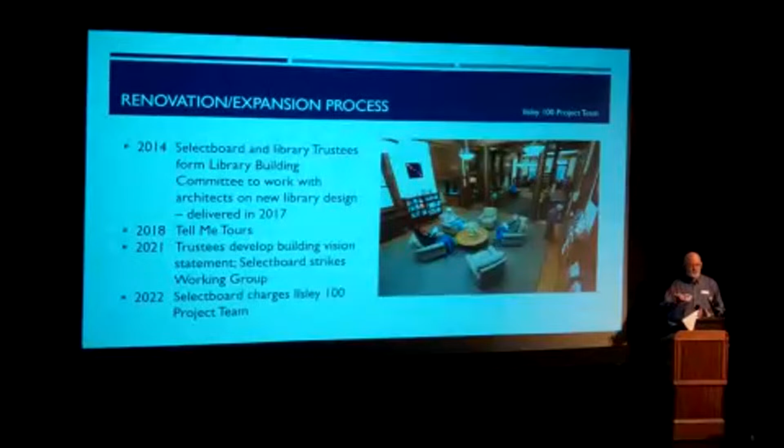Just to give you a quick recap on how we got here: there was the Library Building Committee from 2014 to 2017. When Dana arrived in town, she did a series of focus groups called the Tell Me Tours. The library trustees developed a vision statement for the building, and then the select board struck a working group to think about how to proceed and started the Ilsley 100 project team in March of 2022. Since then, that group has done a lot of work educating ourselves about how libraries work and best practices. We've looked at the space needs of the building, determined some costs, and done a lot of feedback with all of you.

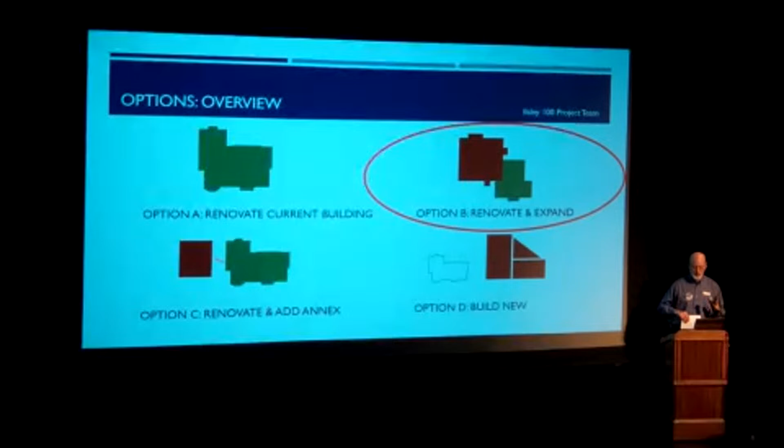Last fall we did some work on what, in general, our approach should be to having a new library. We looked at four possibilities: one was to just renovate the current building but not expand it; one was to renovate and maybe add an annex; another was to build new on an entirely different site. But the one that we got the most positive feedback on was to renovate and expand on the current site. And that is the plan.

So we then embarked on a plan to recruit the best architect and design firms in the state of Vermont, and engage them in what we're calling a design competition to come up with some ideas for us to look at. One thing you'll notice in these designs is that they've all come up with a concept that honors the original building, but they also all envision taking down the existing additions which have been put on more recently.

Anybody know how much the existing building was supposed to cost? It was supposed to cost $50,000. Can you believe it?

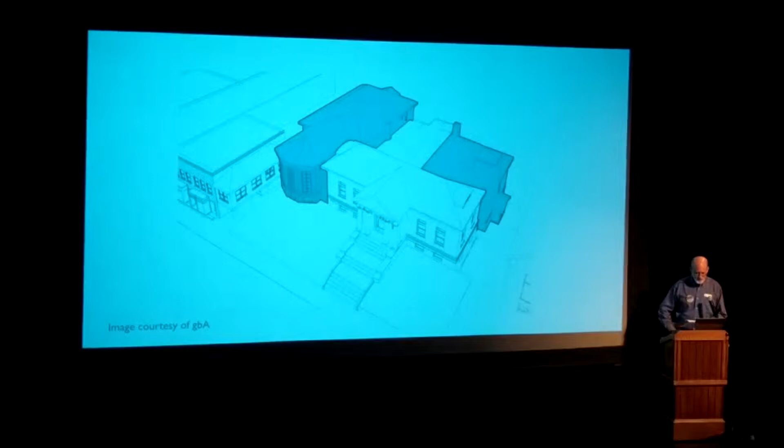Now, it doesn't show up well in this picture, but if you approach the library from the back and look over to the right, between the 1980s addition and the Marquis Theater, there's a lawn. There's a grassy space there, and all of our proposed designs are going to make use of that space.

Now, I wanted to touch briefly on the idea of putting an addition on a historic building. When you look at these designs, some of you are going to say, gee, that looks awfully modern, why doesn't it look more like the original library? Well, architects and historic preservation experts say you don't actually want an addition to a historic building to imitate the original. You should be able to look at the addition and see that it's distinct from the original. It might echo some of those architectural features, and it should enhance the original, but it shouldn't imitate the original.

As you're looking at these designs, I want to remind you that you're looking at what we're calling conceptual designs. We ask these firms for ideas, and computer-assisted design today lets companies produce the most sophisticated, spectacular graphics you've ever seen. And these designs look like we could break ground tomorrow.

That is not the case. If we were looking at these 50 years ago, we'd be looking at pencil markings on tracing paper, and if you didn't like something, the architect would just get the eraser out and erase it. I'd like you to think about these images in the same way. If you see something that doesn't appeal to you, don't panic. If you don't like the type of material being proposed for the outside of the building, we can change that. If you don't like where some function is located in the building, we can change that too. So don't get too attached to how things look. We're really looking at big ideas and concepts here.

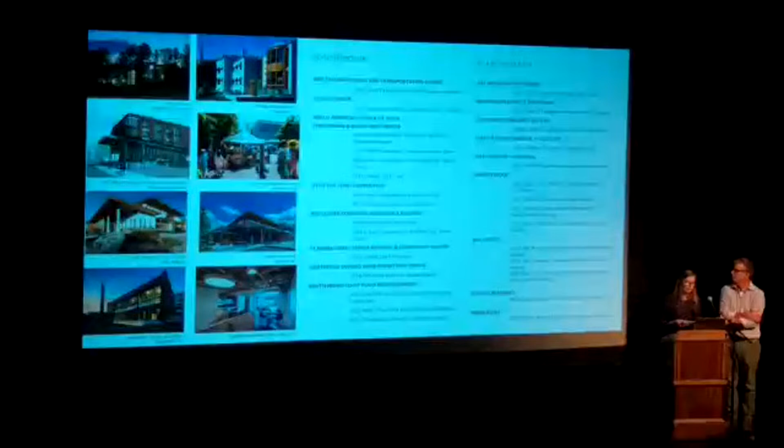So we have a talented team of architects where collaboration and teamwork are really essential. When we work on projects, we work on them all together, so it's really important for us to have a full team, everybody working together on the project. That's who you see up there, that's our team. As I said, we work on school design and libraries. Focus is really important to us as well as environmentally and socially responsible projects. Our design awards reflect our commitment to beautiful and sustainable places. Our team has received over 60 international, national, and regional design awards for excellence. In addition, GBA has received numerous sustainability and green design awards for our dedication to integrating the natural and built environment, including designing over 10 LEED buildings.

White Box Design Studio, we have brought on board with Kelly Bauer and Courtney Cox. We've worked with them, Courtney Davis... Courtney Cox is on Friends, she's nobody else called that, I was just checking to see if people are still listening. We brought them in because they work on numerous libraries every year, and they're at the forefront of library thinking. So we wanted to have them as a team member and a resource for you.

Our typical process, and this is our conceptual design up here for this competition, usually involves having discussions with the owner and the community before we put pen to paper. This is a little different process for us since we couldn't discuss the program with the client. So we based our concept design on the RFP, a site walkthrough, our prior knowledge of working with the library in 2017, and through working on other libraries. If we're selected, we consider this our design response, of course, but it'll be based on the community and your input for sure. So this is not the final design, and I know Joe mentioned that earlier.

Oh dear. Somebody has some music. That's a big thing.

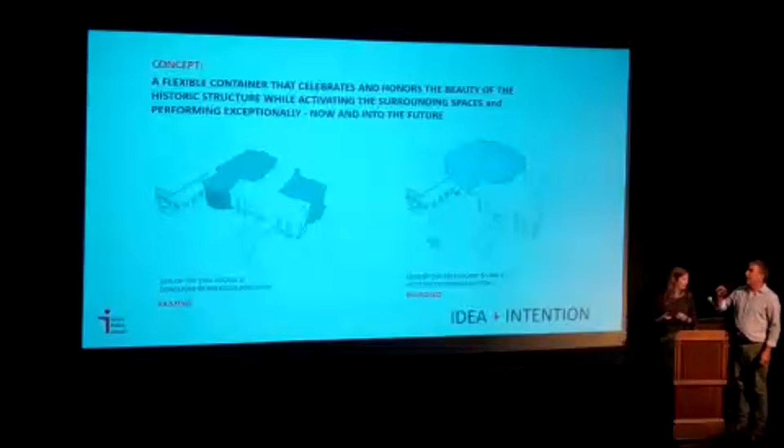This is concept design, and you've seen the image on the left before. We think the concept is relatively simple: over the past few additions, to increase program space, buildings have been glommed onto each side, hiding the beauty of the historic buildings. So with this new addition, we're making a flexible container that can change over time, but also highlights what's beautiful about the Ilsley. Currently 50% of the building is covered by additions, and we're looking to expose 100%.

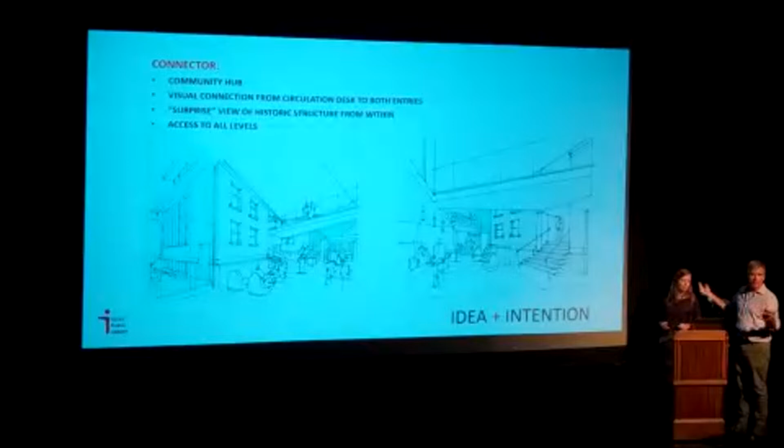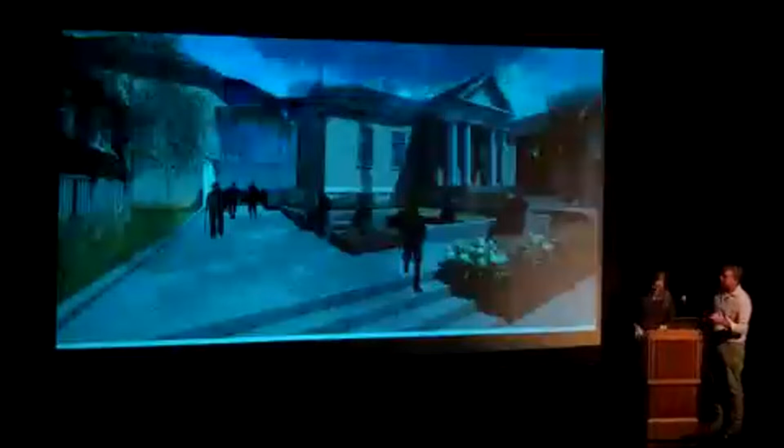Oops, I'm going to do that one more time just because it's pretty fast. Now I can talk through it.

Here we go. This is walking from Main Street towards the entry. We'll walk past the part covered by the '88 addition, but the key thing you could have missed looking at the building is you see the welcome desk right away from the entry. Here's this person spinning around, you can see the elevator and the stairs and looking back into the reading room, and then bridges up above, open space for the first and second floor. It's really highlighting the 1924 building.

But then as you walk in this side, you can see the welcome desk is there too, and there's a book drop. So it's really about this being the central community hub.

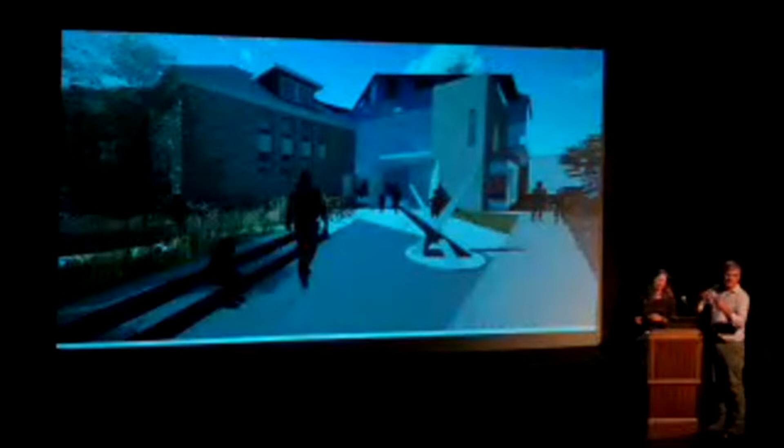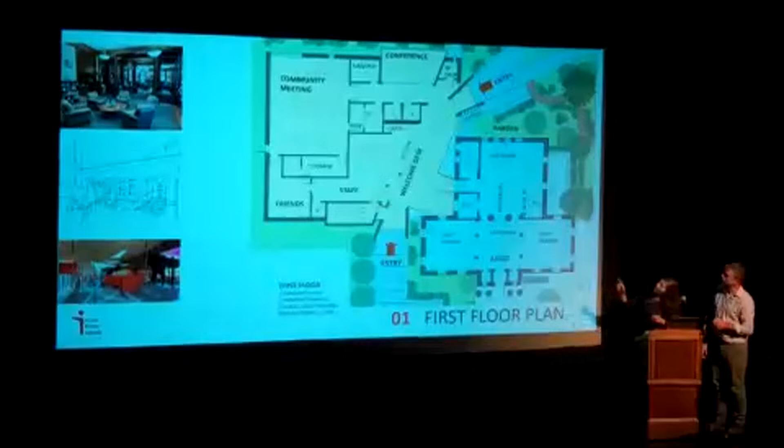Also with our conceptual design response, we looked at having a really simple container that was flexible for the new addition. We love this because it has a lot of opportunity to expand or change over time, and that's important because hopefully we'll be here for another 100 years.

The community space, we know it's kind of down below now; now we have it up on the first floor. You're able to fully open it up at night when the library is not in use. We have the adult stacks over in the existing building, and we love the building you have over here, we thought that would be appropriate. And then there's an opening to this reading area between the town offices, and that's where the '88 addition is too.

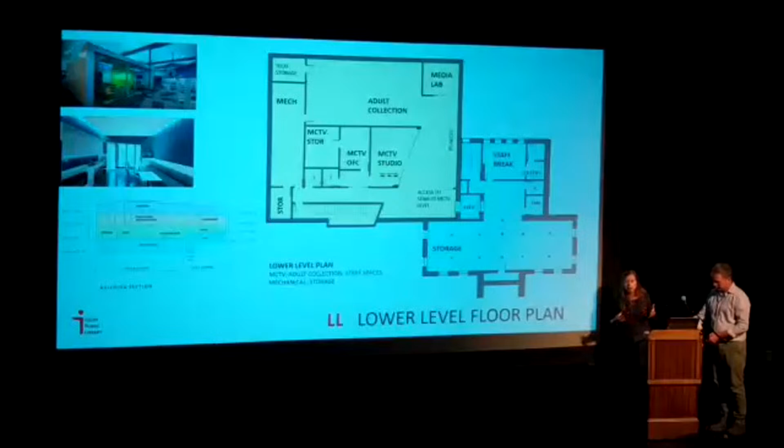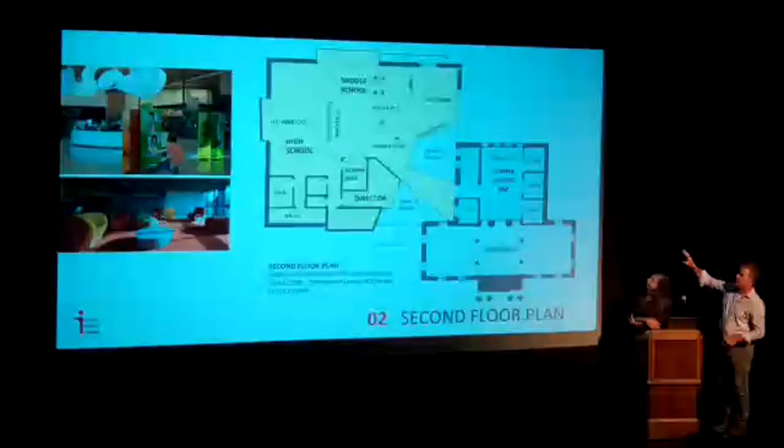We made a good guess at it, but it does provide tons of opportunities with this simple container. The big thing is delineating those spaces with furniture rather than walls, and also picking up on cues about what the existing and old is—the community living room looking down at the adult section, and when you enter from the elevator looking down into the other.

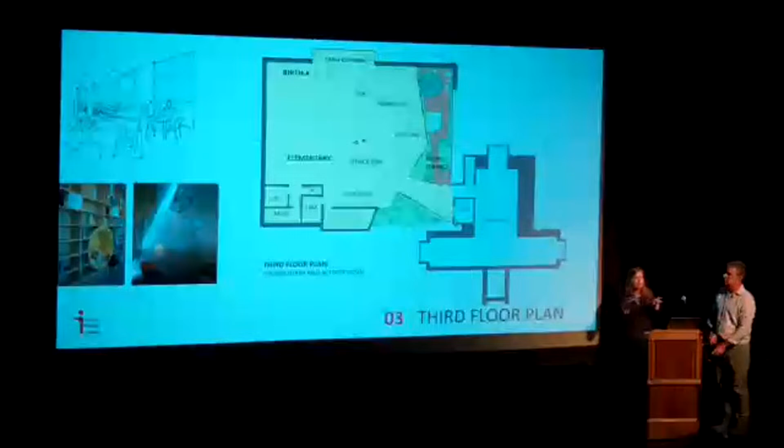So there's some similarities between this addition and the existing. This is our third floor plan, which is even with the MCTV floor level you have now. This is where we put the children—we thought they should be out of the basement and up, kind of celebrated in the place with the most daylight, and also be a safe space.

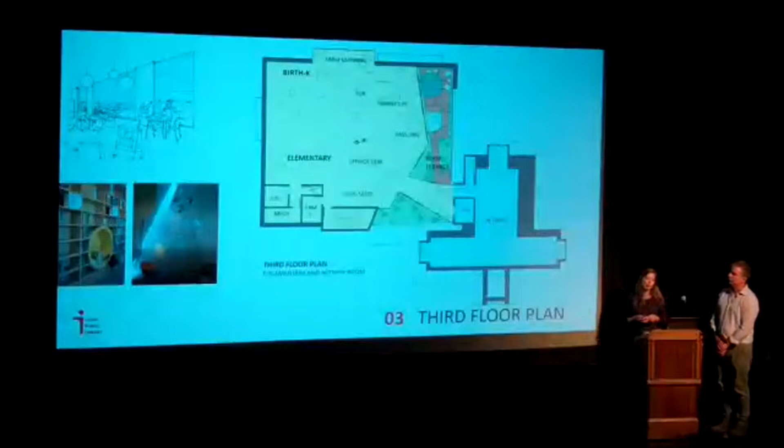We've created a roof terrace adjacent to the children's area. This is a great place for programming, not only for the children's group, but for anybody in the community to go out and sit on the terrace with nice views. We really think it'd be a cool spot to sit up there and look at the roof of the Ilsley and the creek beyond. It's just a really unusual opportunity.

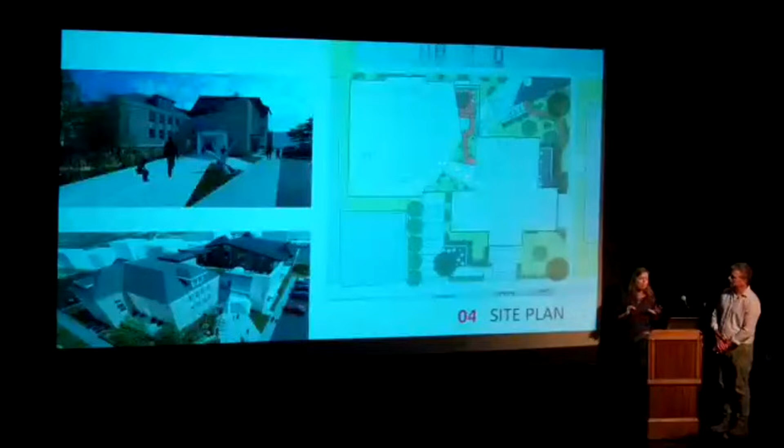This is a site plan, so we're looking down on the roofs right now. Again, you can emphasize that 1924 building, and that bridge is a connector with a simple box in between. You can also see that roof terrace, and you notice we have a lot of green space—as many opportunities as possible, because we know you already have existing programs where you use those outdoor gardens a lot. We want to build on that and create any opportunity for more programming and connection to the outdoors.

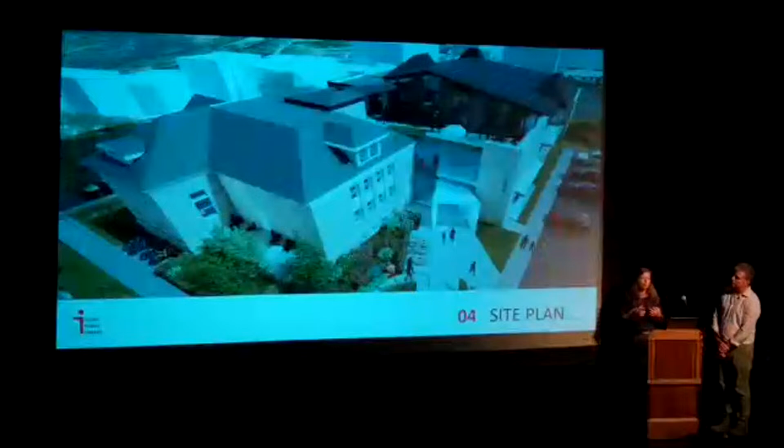Steve touched upon having that—where the stairs and elevator, removing that area gives us an opportunity to have a connection with the town offices, where you have a bench now that's highly used. This gives a bit more breathing room and a connection with that building as well.

So that's the general idea of the concept we're going with. A big thing, as Nathan mentioned, is we're used to working with the community early on at the beginning of a project—we didn't have that opportunity here, but we had great info. The Ilsley 100 project team and Dana put together these challenges and pillars. We took those, and I want to show how we'd normally work with you all, and if we're lucky enough to move forward, we'd revisit these ideas again.

We took all this information and asked where these things overlap, and how we could decipher these different challenges and pillars and respond to them in a building. These are the sorts of questions we're asking ourselves, but in a lot of ways we'd normally be asking you. We'd say, here's our ideas about safety—let's increase sight lines. So we did that with bridges and connections to the first and second floor.

We have low furniture so we don't have shelves blocking the way, and we have glass in the meeting rooms on the second floor of the 1924 building. But again, these are just things we're going to talk with the community about—this is really to emphasize that this is concept design.

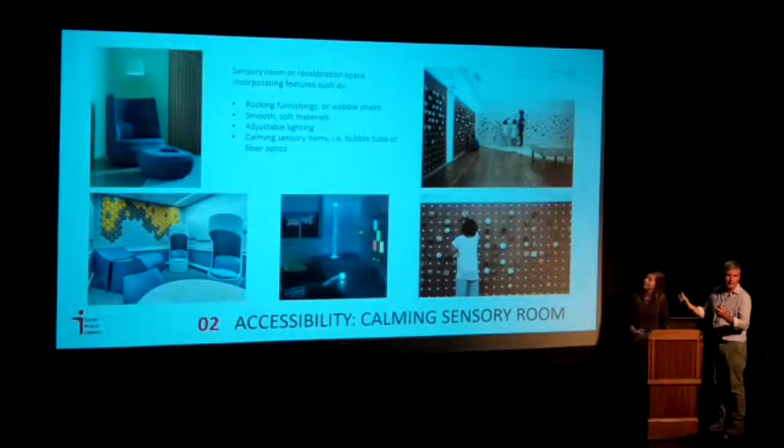You can do it in interesting ways that don't always require hard walls. Those chairs on the left are nice library chairs where someone can be cozy reading a book, kind of by themselves in the middle of an open space. There are really interesting ways to maximize flexibility without building hard walls. Another thing we said was a flexible container with storage.

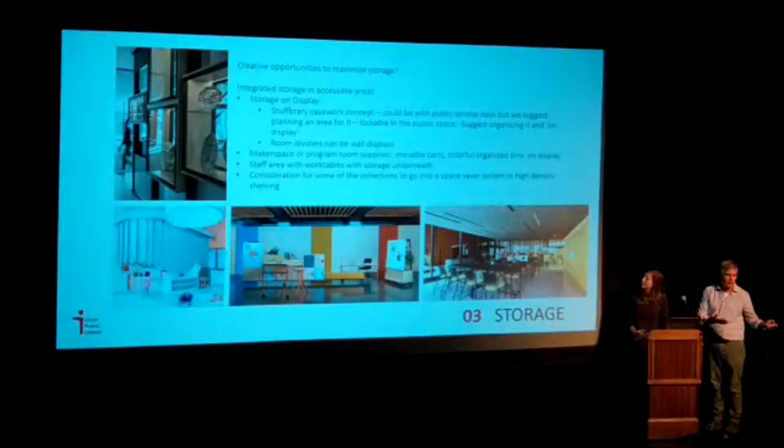It's incredibly important to have the right amount of storage. You need storage for things you'll only use twice a year, but more important is storage for things you put away for two days and bring back out. Where is all that stuff and how is it designed in the space? Even the stuff library concept, the casework concept - if you're lending out a microscope, where is that stored? Do people even know you can lend those things out? If we can start to put this stuff on display, it gives some really interesting responses.

Maintenance is pretty clear - we want things to be durable. A big reason for this is so staff isn't spending time cleaning and taking care of things, and can focus on patrons and programming instead. The funds that go to the library aren't spent taking care of things that aren't standing the test of time, but go to programming.

Functionality for staff - they need a place to go and regenerate, a place of their own, but also when they're at their station, they need the right equipment and capabilities so they can serve really well and aren't running off looking for something, and that has to do with tech support too.

We didn't do much on tech support because that's not really about the building, but it's fun to talk about. There are buildings now where robots go to cars and take the books - people don't even want the book truck, they want the robot. Now this one's very specific here, and we think this should be celebrated.

For outdoor programming space, we have it on the roof, building upon what the Ilsley has already done with outdoor programming space. We see that as the place for surprise and delight, taking every corner so the library is going out to the property lines, not just confined within the building.

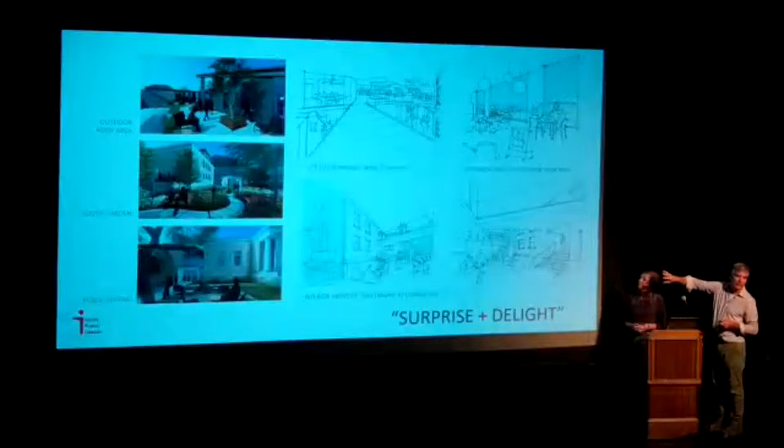On the upper left is the roof garden, we have the garden by the parking lot, and the outdoor reading area facing Main Street. Inside, the surprise and delight comes from entering the building and being represented with the 1924 building. These are all sketches we've done - computer-generated sketches as sketchy as our hand drawings over here. This is just the beginning.

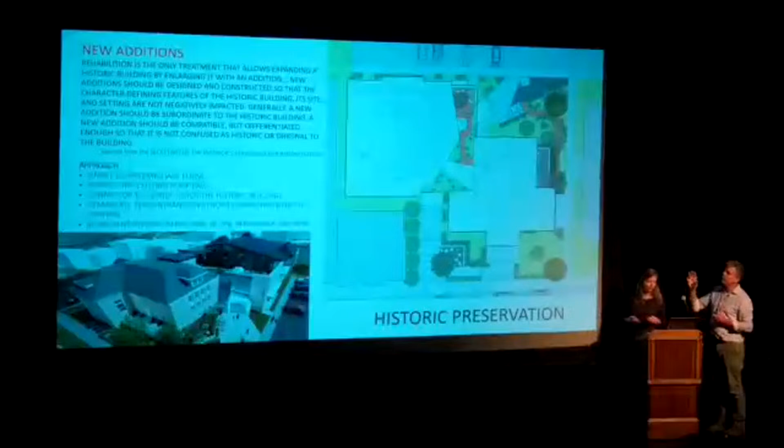I won't touch on this - Joe did a great job. We have a rectangular, or really square box, that we wanted to be complementary of the existing building, not overshadow it, but be respectful and honor the 1924 building. That's really what we were going for. Down here we tried to hold the eave lines - the roof of the existing Ilsley is playful with arched dormers, gable dormers, hip dormers. So this third floor we put on is like our new dormer, picking up on some of the major pieces but in a different way.

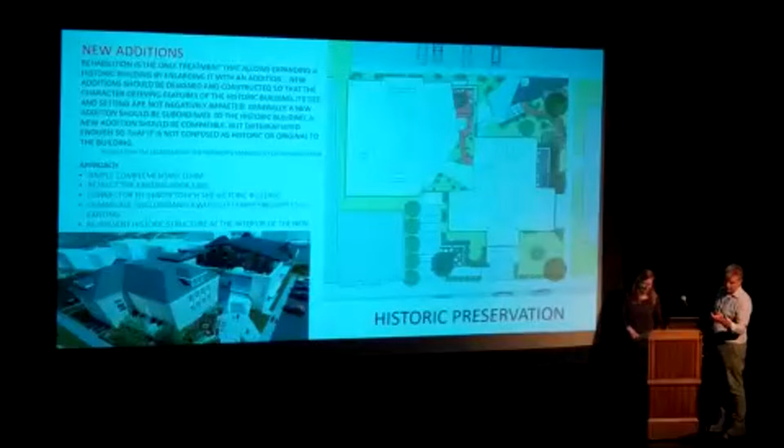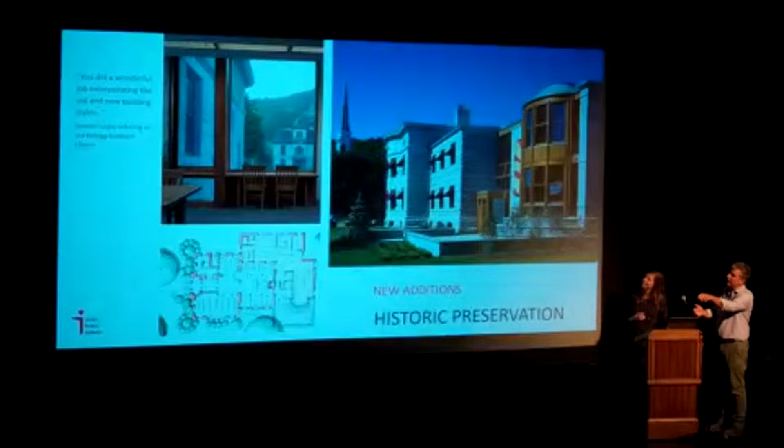This is the Ilsley, or the Kellogg Hubbard Library in Montpelier - this is the link we're talking about. In our case, that's the community hub where the stairs or welcome desk would be. This is it from the inside, with a similar treatment - from the outside you can see the existing building, and it starts to come to the inside. That's really what we're going for.

Sustainable design permeates all the work that we do at GBA, but instead of going through our whole process for sustainability, since time is limited, we just wanted to share with you a couple of the buildings that we're proud of.

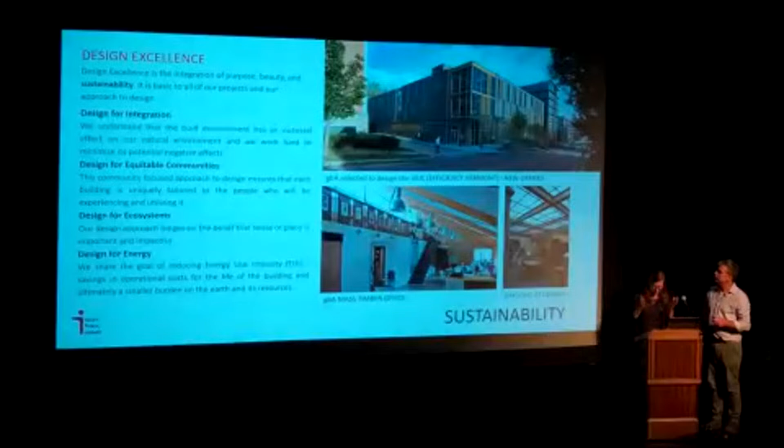One of our proudest moments was actually to get this project teaming with VEIC, the efficiencies in Winooski, a couple of years ago. They selected us for our commitment and dedication to sustainable design. We are known for designing buildings that have a low operational carbon footprint.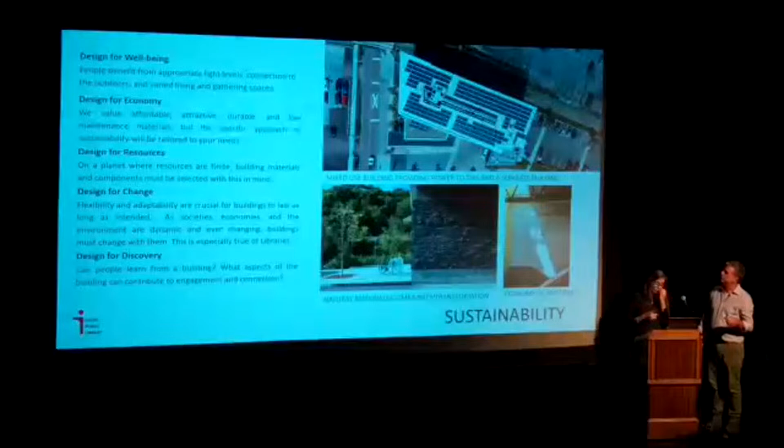And now we're moving towards low embodied carbon buildings. These are just some other examples. Almost all of our projects have PV or some kind of feature that gets us closer to net zero or net zero positive buildings. It's really just ingrained in everything we do.

So are we done? Oh, okay. Well, thanks for having us.

We hope we created a design solution here that honors the historic 1924 Carnegie-style building while providing a forward-thinking solution that has elements of both surprise and delight.

I threatened people that if they went beyond their time, we would tell the orchestra to play them off. And thanks very much, Diantha and Steve, that was great.

They touched on a couple of things, and I should say that every one of the design firms we talked to complained bitterly about the fact that our design competition did not permit them to come and get ideas with us, because they all said this is not how we like to work. So we apologize to you for that. And I wanted to thank you guys as well for calling out the role of the staff, which is absolutely essential. When you're considering how the building is used, you can think about you who go in there for a few minutes or a few hours a week, and our staff for whom it's their workplace.

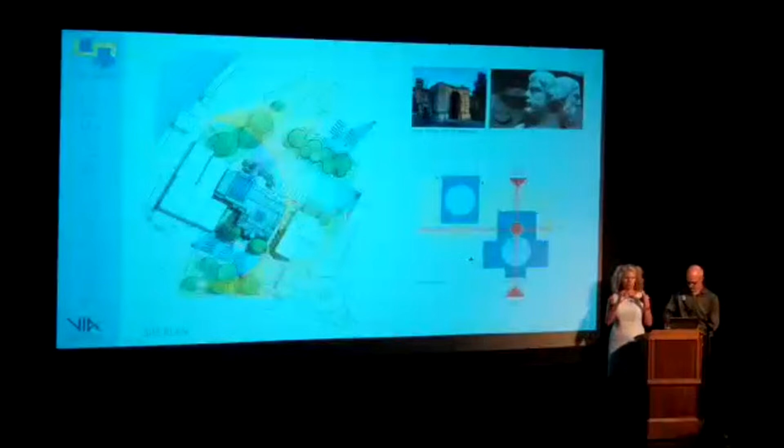But what I really want to talk to you about is this simple diagram here on the right. This diagram attempts to really quickly define the overall big idea for the project.

What you see here in blue are two areas, we're calling them nuclei. The larger blue area is the historic building of the library, and the smaller blue area is the second nuclei. It houses other gathering spaces like the community meeting space, the children's meeting space, activity room, etc. Holding them all together, pardon the metaphor, is a membrane. The membrane has all the other functions, the circulation spaces for people, the circulation spaces for books and collections. It also has support services, facilities, restrooms, etc.

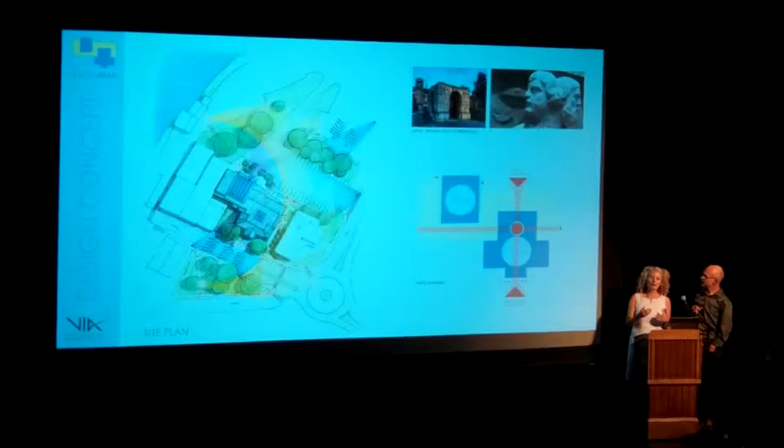Then the red is the part that's really exciting to me, because we're proposing a library that has two fronts. It's very hard to have a back here. We have two fronts, one front facing Main Street, and the other facing the river and the east side of the building. These two fronts come together in the center at the circulation desk. So no matter which way you come into the building, you are confronted with a happy face, somebody to help you navigate the building. Also, so library staff can see who's coming, make sure people are being serviced appropriately.

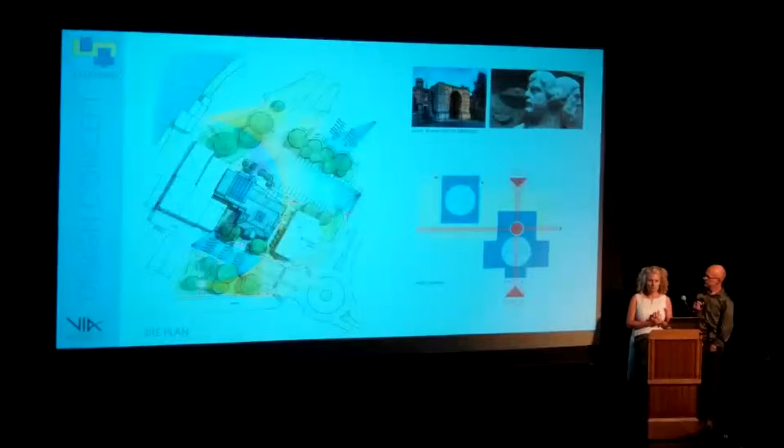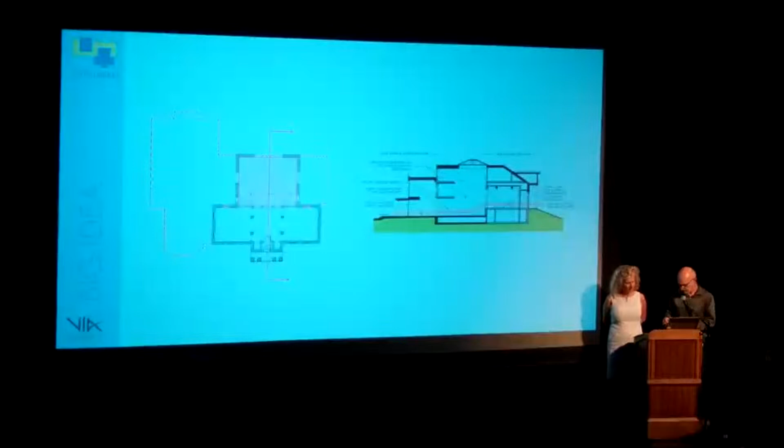So this is where it gets a little bit exciting, where we really took to heart the idea of making a big move to really integrate the historic building with the new. So what you're looking at, use the pointer here, this is the library in plan. These are the two additions that are proposed to be removed.

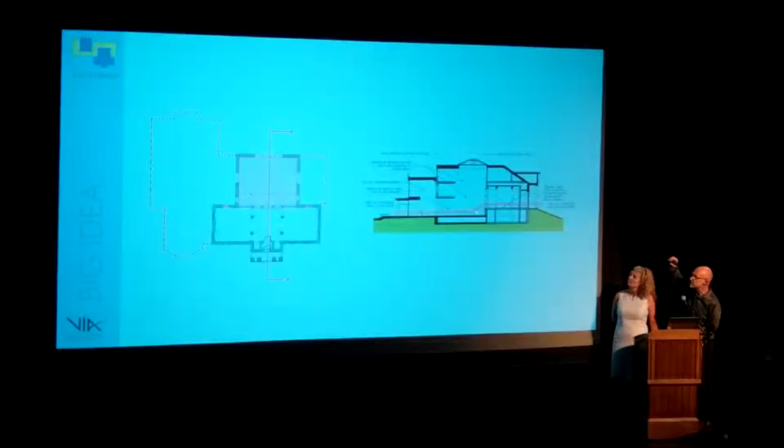This is a section cut, as if you slice the building in half and you're looking at that building vertically right here. And this right here is the stairs coming up outside from Main Street. You can see the columns here, and this is the current reading room. What we're proposing to do is, behind where the current circulation desk is, there is a really tight area here. The ceiling heights are really small.

So we're proposing to take that floor, this area right here, and lower it down to the level of the ground. It's completely accessible from the sidewalk and parking areas. Then, to make it even better, we're proposing to take out portions of the second and third floor to create a nice open atrium space with a skylight to let in lots of light.

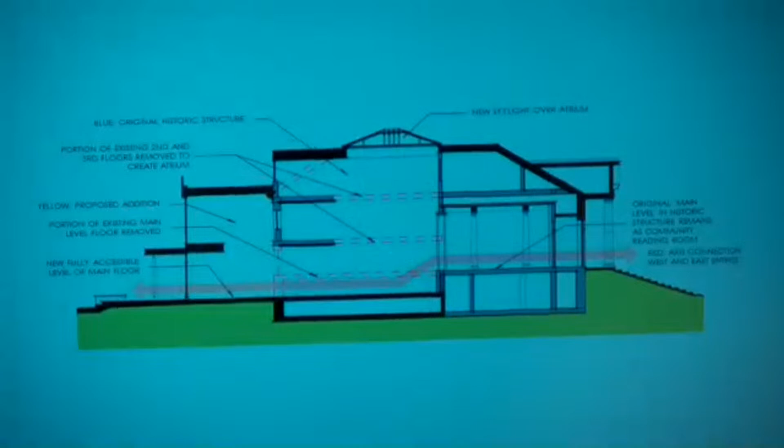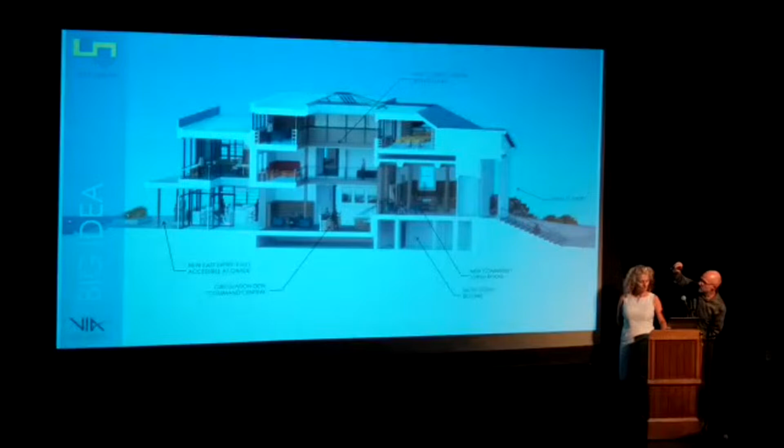Here's a more three-dimensional view that we can walk through. Again, walking up the stairs into the original front entry. This is the reading room, which we're proposing becomes a community living room. Then right here, where the floor would have normally gone across, it drops down and opens up. You can look over the railing through these beautiful wood columns down to the circulation desk here. Or you can walk in from the creek side, right on the ground level, and see all the way up to that reading room. We're going to show you a couple images that express that.

You guys want to see a walkthrough like GBA did? Okay, not to be competitive or anything.

You're on the Main Street building now, the historic entrance. Climbing up and into this new space. Now again, look, we've opened that up beyond. This is a nice, comfortable reading space now. You can go down to that area where that woman is—we're going to just jump over the railing, actually, instead.

So if our community decides 10 years down the road that the children shouldn't be on the second floor, they should be on the first floor, we can make that happen. I think it's important, because when people ask us, what is the library of the future, we tend to jump to technology or all sorts of things, but really we don't know what the library of the future is. We know you're going to need a library, but perhaps flexibility is really the key here.

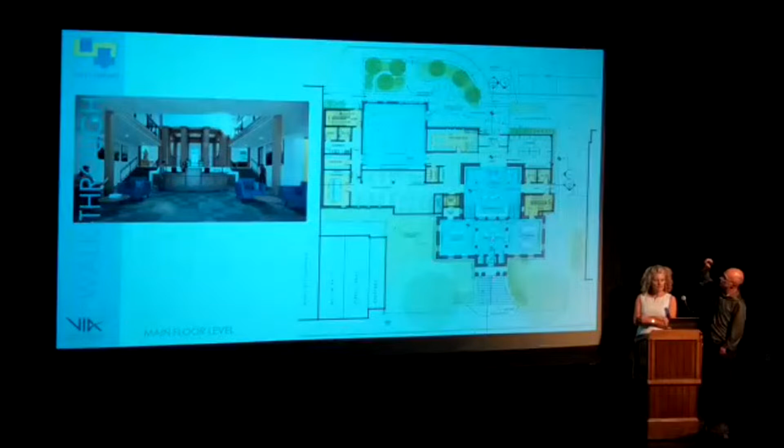This is the main floor, and Ben's going to point out the two entrances to the building: the east entrance facing the creek, and the main entrance from Main Street. If you come in from the creek side, one of the things that's really exciting to me is that you're seeing the building from the bridge. When we built the Cross Street Bridge, we didn't realize we were going to be looking at the backs of all these buildings. Now we have this building that has fronts.

We have space on the ground floor for a community meeting room that is flexible and accessible after hours. We have lots of spaces for staff, and we have an outdoor book drop that goes right into the staff room, and some of the most frequented items, if you want to come in quickly, read a newspaper, check out the latest fiction, etc.

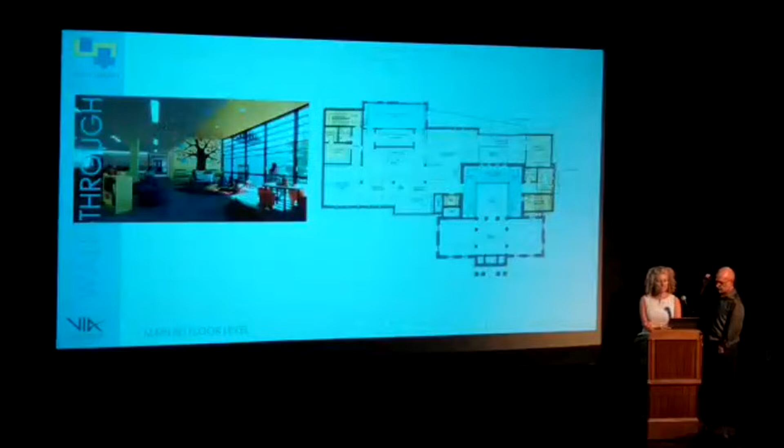The second floor is dedicated entirely to the youth collections, and it goes from left to right, youngest to teens, over in the corner near the town offices. And who wouldn't want to take a bath in the bathtub right in front of the window looking out over Main Street?

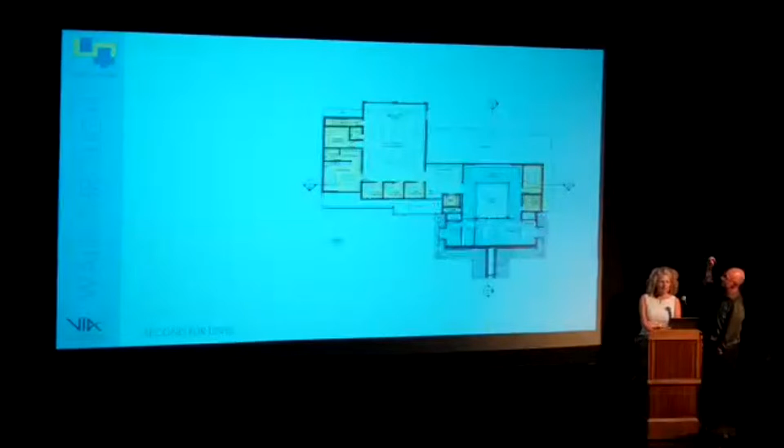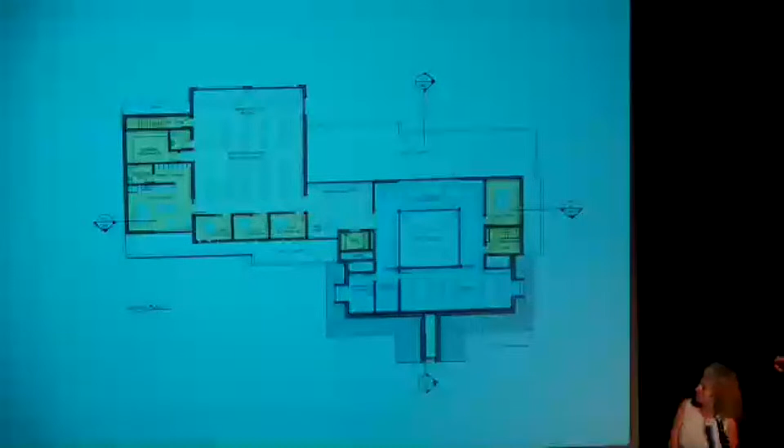On the uppermost floor, we have the remaining adult collections. We have a series of staff and staff spaces, and then a series of small meeting rooms and places for people to come and study, small businesses to work, even places for the friends who have a large, lovely space up here with easy access to the elevator and the stair, but they can use one of the meeting rooms if they need it for sorting, and then an office for our director and assistant.

This is showing the Creekside entry. We wanted to use a building form and materials that were natural, durable, low maintenance, and forms that would express the activity going on inside the library, but also a form that was able to embrace the historic.

I would love for you to come and take a look at the model, get down on your knees, because that's the best point of view to see it from this. Or we'll lift it up for you. Yeah, we can lift it up for you too. But please come check it out, and I'd love to share more about the materials and form with you.

Just a few more images here, and I want to talk about sustainability. Taking care of our community involves also taking care of the planet. These ideas are inextricably linked, and we often start our projects with the United Nations Sustainable Development Goals.

That adds to what we typically think about sustainability, so we're not just talking about energy efficiency and carbon, but we're going beyond to consider poverty in our community, health and well-being, education. These are all things we take very seriously, but we do know buildings, and buildings that are energy efficient. We imagine this building as one that is not using fossil fuels, no oil, no propane, natural gas. To do that with an historic building is really tricky.

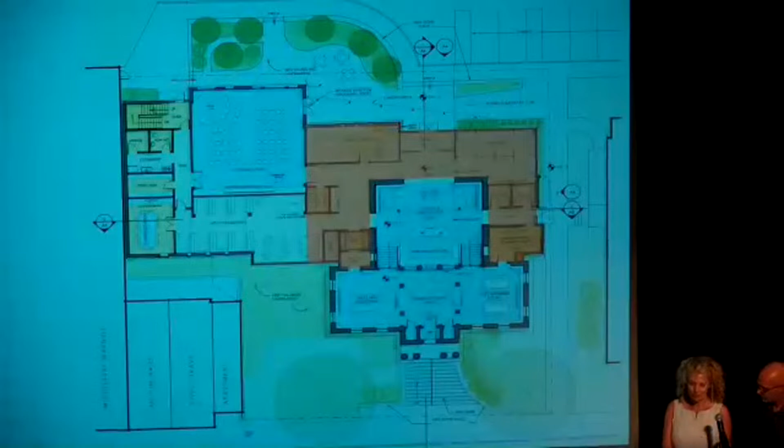So in summary, I'd just like to say, if you take these points away about our presentation, we love libraries and we recognize their critical importance in our communities, and we know that the community knows the library best of all. We're really excited to hear your feedback. The historic building must be embraced and house a most important function that continues to be used as Mrs. Ilsley wanted it to be used for the next 100 years. So thank you again. This is one of the most important buildings our community will take on, and it'd be a privilege to work with you to realize your vision for it. Thank you.

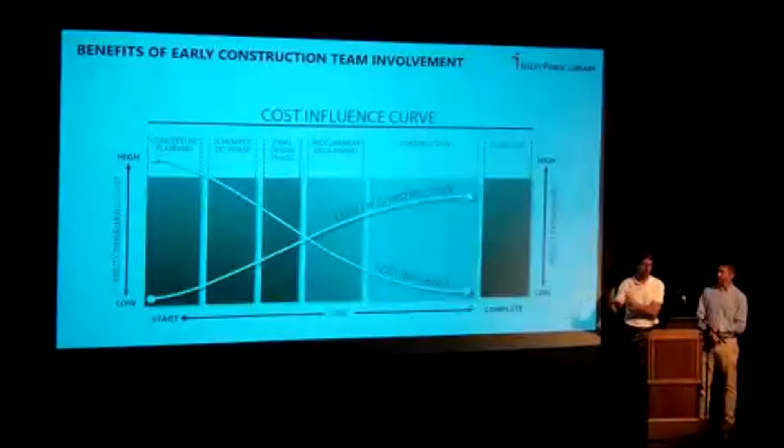Why is that important to us? That's great experience in Middlebury. But by having this unified team of architect and builder, we're really leveraging the best of our past experiences. We have significant experience managing and running municipal projects, making sure they're on time and on budget. We're also really excited that we're allowed to engage in this process so early on, to have the most influence on the overall project cost and design.

We've heard about the top 10 design challenges. All three competitor teams were given great guidance on these top 10 design challenges, which were then filtered into 6 design pillars. We hope that as we present our concept and initial ideas, you'll see that we've really reflected the design challenges as well as the pillars.

Most notably, like the other teams, sustainability is core to our values. We're seeing it and living it throughout the state, the country, and the world. We're excited that this team has decided that's very important—energy efficiency, carbon reduction, and overall sustainability. We'll touch on that in our design in a moment.

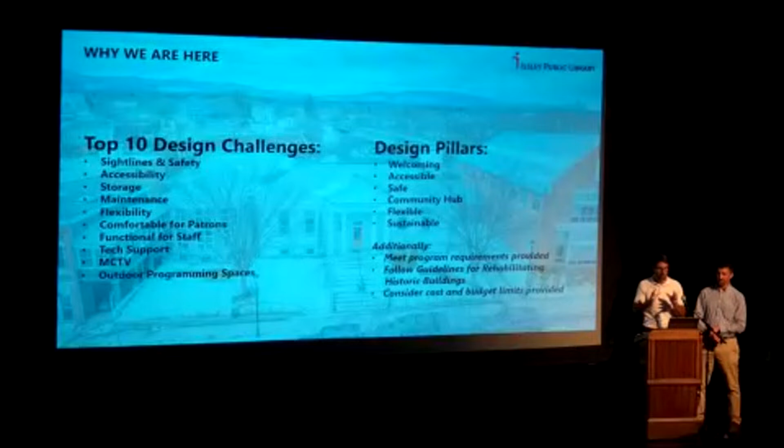You've heard this evening that the design process so far has been without a lot of personal interaction with the group and community. That's a major piece of designing a building—having communications and understanding what's most important to you. So the process so far has been what we call 'move in and understand,' getting to know the needs. We've been provided a program of space, which has been extremely helpful, and adjacencies—the Ilsley 100 team has looked at how those adjacencies need to fit together for a successful project. We've seen some written project goals, but what we haven't had is a lot of discussion and feedback.

So we're at a point where it's extremely early in the process and there's a long way to go.

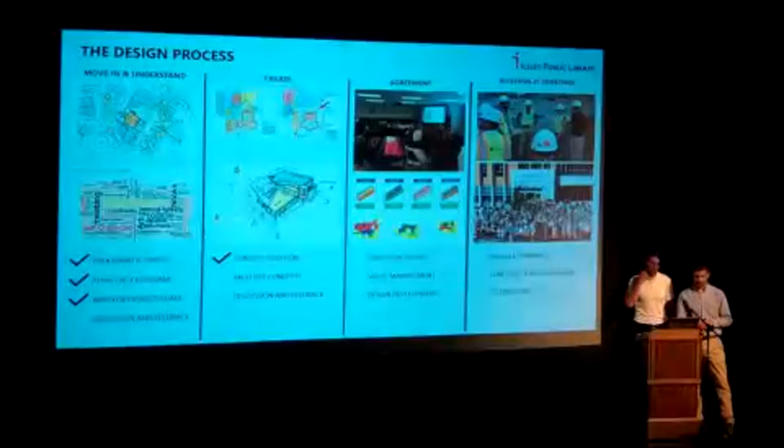As we developed the Secret Garden concept, we looked at different ways to utilize the site. We actually started with a 3-story concept, and as we moved forward, we found we could best meet the program needs by changing it to a 2-story concept. That's one of the distinguishing features you'll see this evening—ours is based on 2 stories.

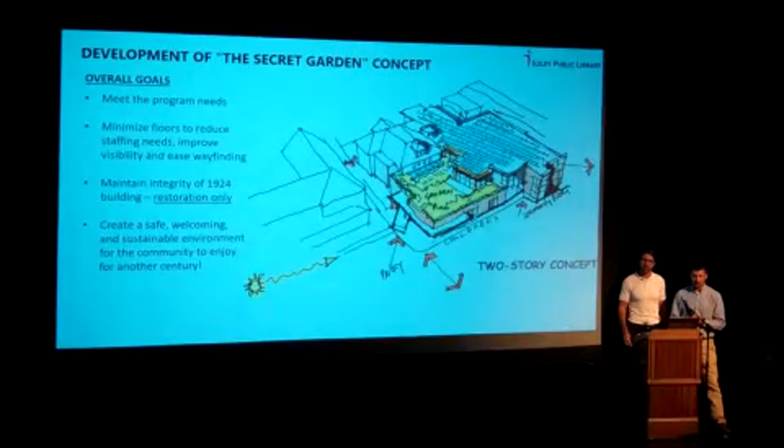Our overall goals: meet the program needs so well outlined by the Ilsley 100 team, minimize the floors to reduce staff needs—a key part of our philosophy is having staff on a limited basis where they don't have to keep track of more than 2 floors. We want to maintain the integrity of the historic building by restoring it, not changing it in any major way. Most importantly, we want to create a safe, welcoming, and sustainable environment for the entire community to enjoy for the next 100 years.

Much like the other teams, our process begins by analyzing the site. We look at where vehicles will travel, where pedestrians might circulate around and between buildings, where views may happen up towards the river, from the bridge to the building, and throughout the town. We also analyze the adjacent buildings—how can we approach them, and how can we create spaces between them. All part of the project analysis.

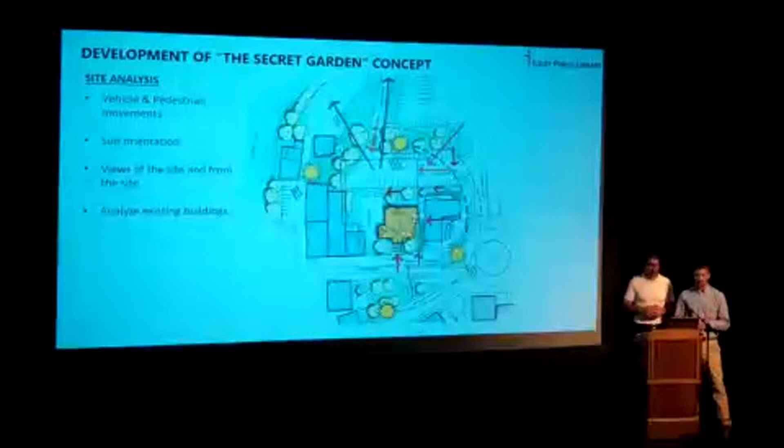When we looked at the goals and how it fits onto the site, considering Main Street accessibility—how do we get people from Main Street into the building—we're actually one of the teams that brought the building right out to the street. We tried to create a continuation of the streetscape. There are various ways this can be handled, and we've shown one option, focusing on an entry compatible with pedestrian approach.

We've wanted to enhance a pedestrian connection between the town office and the Ilsley Library, defining some pathways and providing more options for people. We also wanted to use this space on the backside of the building, closing it off to create a plaza that could be used for book sales, the bookmobile, food trucks, and other things to bring activity to that portion of the site.

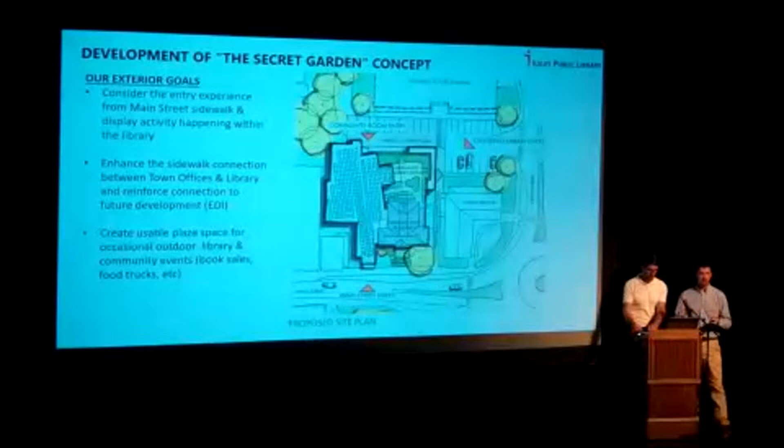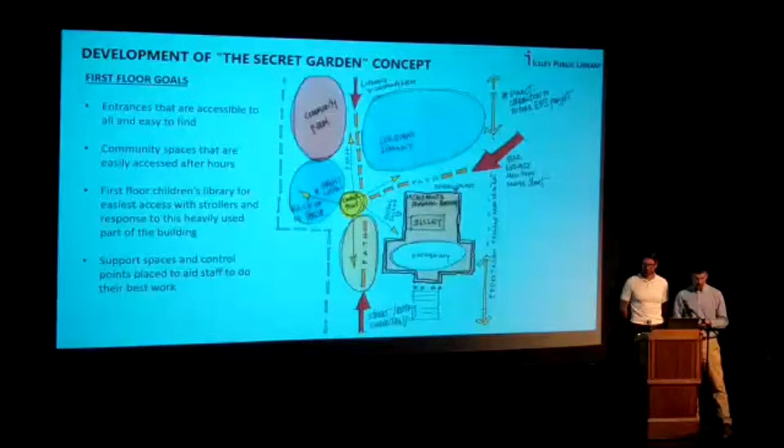The first floor goals started as sketches: what is the most important space, and how do we fit all these spaces within? One of the things we needed were entrances that are accessible and easy to find. The three arrows indicate the points of entry to the building, and the star in the middle indicates the circulation desk, visible, so they are able to see all of the entry points from that one location.

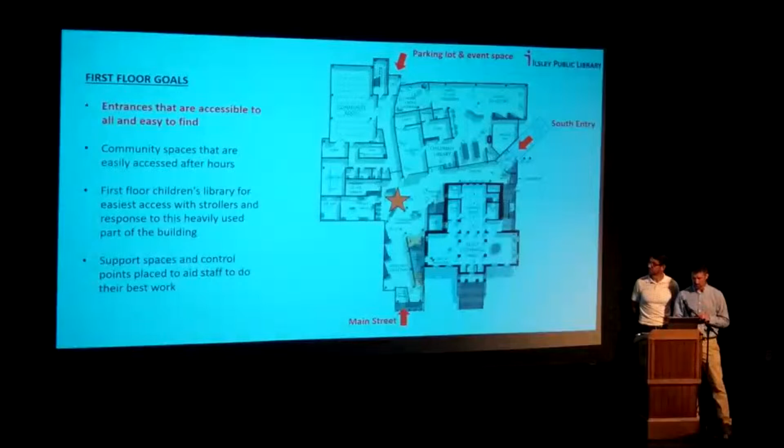Once entering the building, on the left is the existing historic building, with a skylight just above that allows you to see the upper portion of the existing building, and through glass, the children's area. We're really trying to provide visibility to many different things throughout. Straight ahead in that image is the main circulation desk, that control point we talked about.

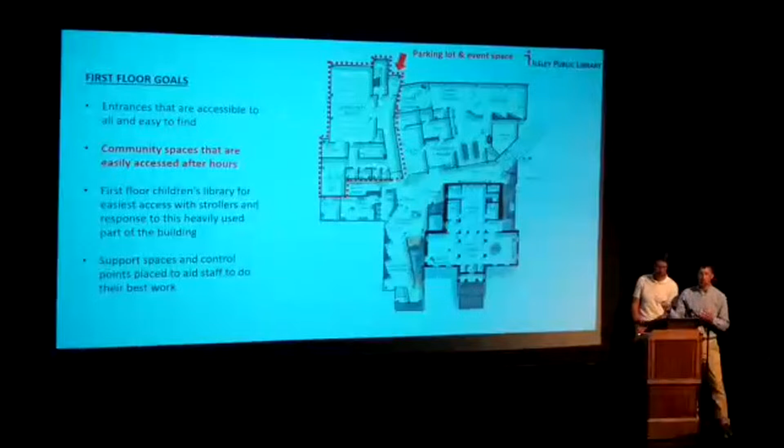Another important aspect of our proposal is to have community spaces that are convenient and accessible after hours. We've located these spaces so the community room, conference room, toilets, facilities, and kitchenette can all be used after hours.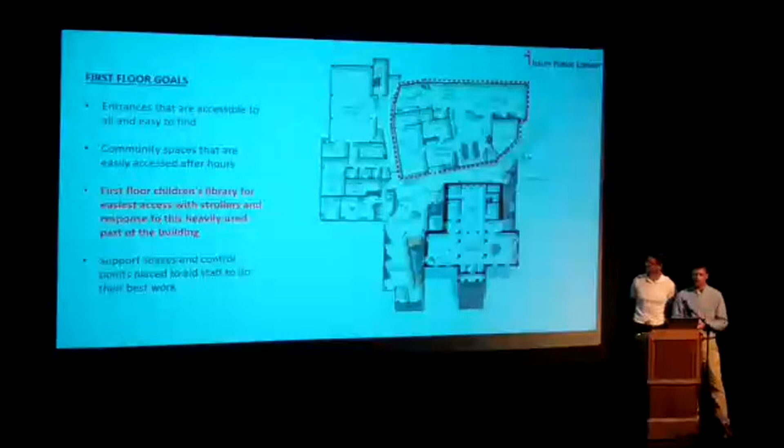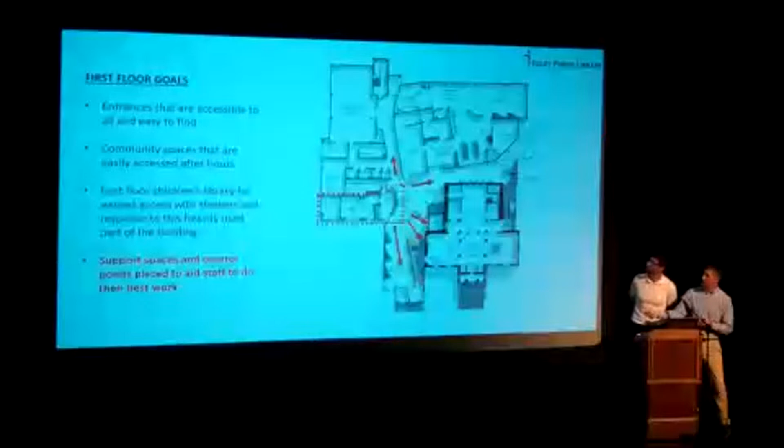A main feature is having the circulation desk in the center, which allows good visibility. All the arrows indicate they can see down to the main entrance on Main Street, see the stairway in its entirety, get a sense of the adult gathering space, see into the elevator, and see the other two entrances as well.

This view is from the circulation desk, and I'll point out that we do have a virtual reality of this space, so you can pan around and see what you would see from that perspective.

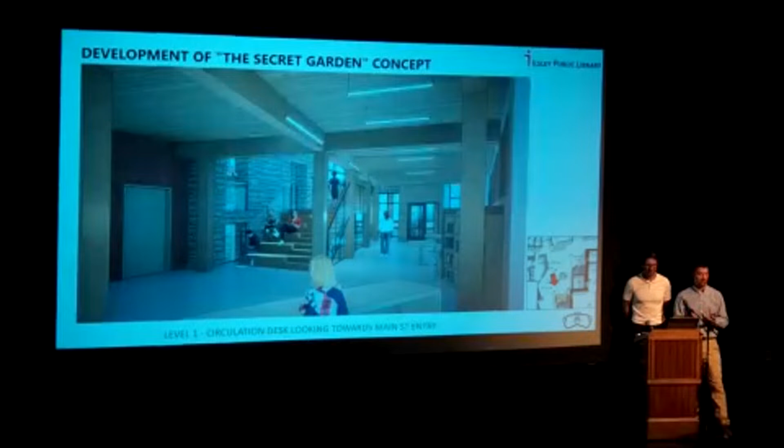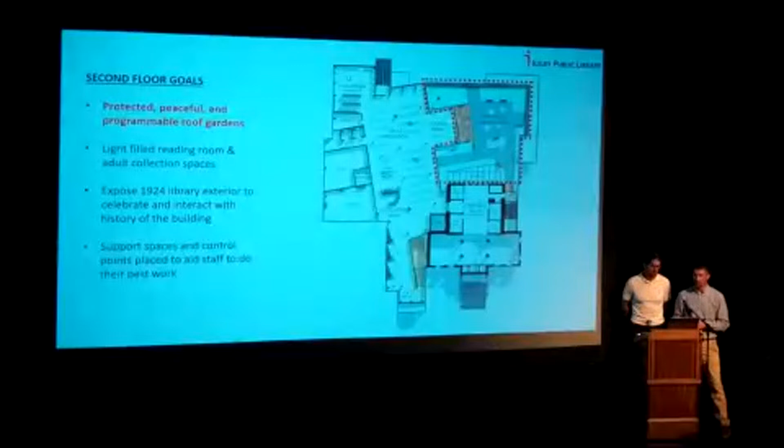Similarly, on the second floor, we've identified the main things we want to show within our concept, all initially as a sketch, turning into a hard floor plan that is still very changeable. One priority was to get a protected, peaceful, and programmable roof garden. We've allocated a fair amount of space on the second floor for this, which could be used for artwork or art classes, programmed for different age groups and times of day. The hope is to allow it to be flexible enough to become whatever the community desires.

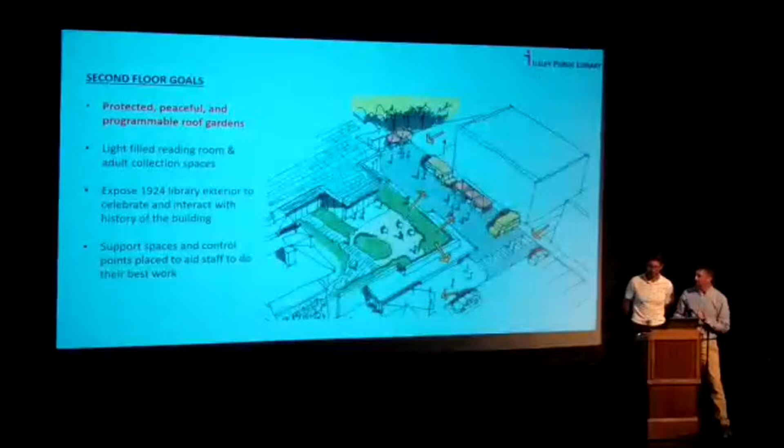Here's an exterior aerial view of that interaction. You can look over into the parking lot, and over into the entrance. It is protected from those spaces by being a floor up. That space can be very flexible - it can be used for food trucks, for the Friends of the Library book sale, and it's also used at times for parking and circulation.

Another goal of our project was to create a very light-filled and open reading room for the adults. It is immediately off of the green roof terrace, close to the circulation desk, and accessible to all portions of the existing library as well.

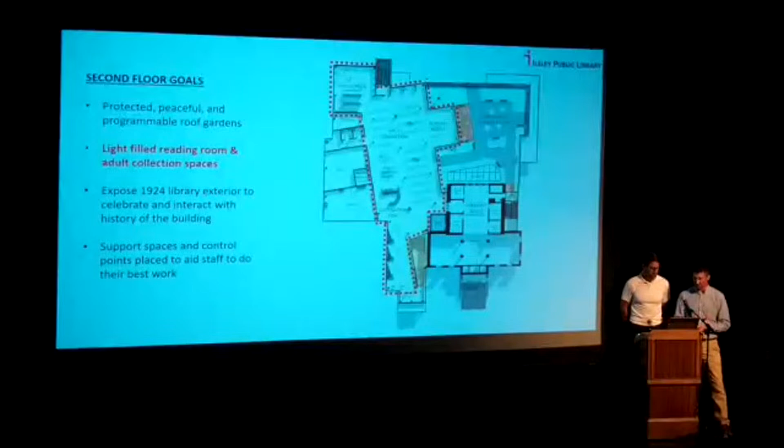A quick view, again virtual reality, of this corner. What you see in the background out of the windows is the backside of the current library. And again, another view from that upper floor - you can see some skylights on top of the stairway.

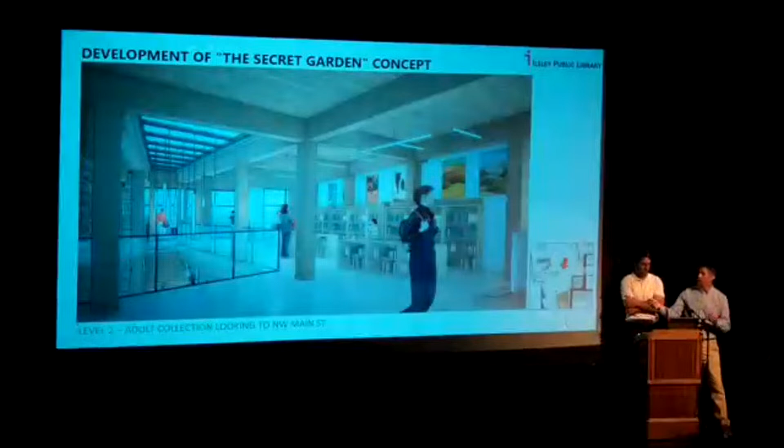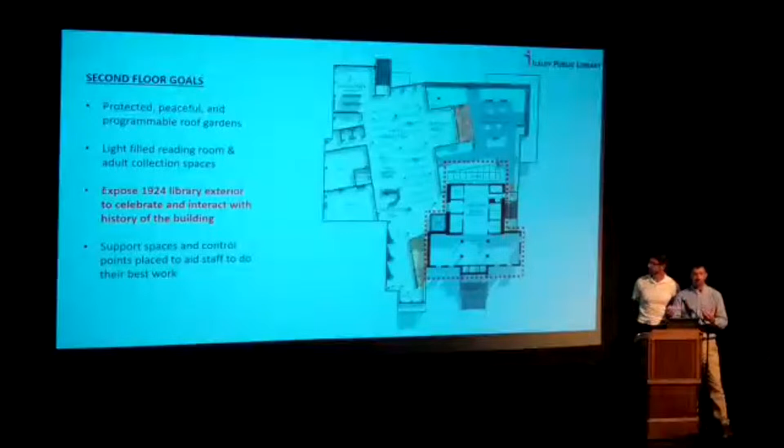One of the aspects of our proposal is to expose the existing library. We're having skylights adjacent to it to let light filter from the outside down the walls of the existing library, making them part of the interior of the created spaces. Again, circulation and visibility are key aspects of the program.

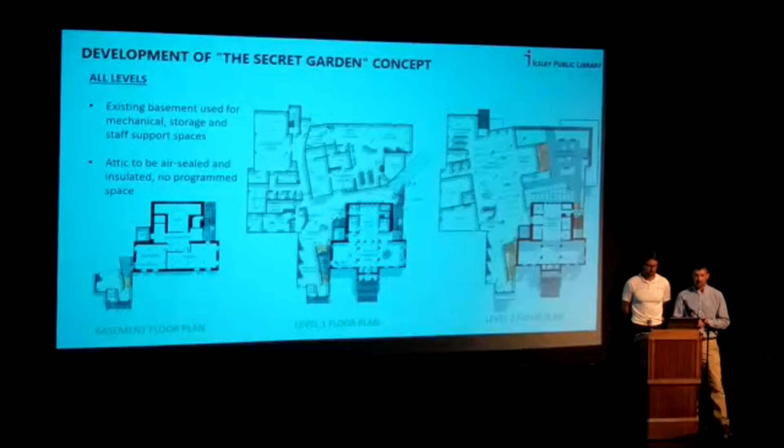We've got 2 floors, 2 circulation desks with very good visibility. In summary, one of the main aspects of our proposal is to limit the use of the basement for staff areas, storage of lesser-used materials, and some mechanical space, with 2 floors overall. With the existing attic, we're going to use it as an option to insulate it, air seal it, and just let it be attic without using that space further.

Our Main Street approach is one where we've looked to tie in a portion of the library that is present and obvious to visitors. The intent is to fit in with the scale of existing buildings and make it an approachable, transparent entrance that is inviting for people.

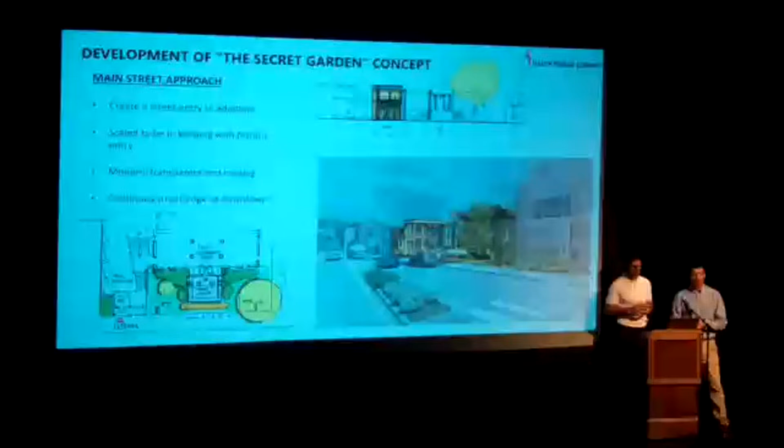One thing we've discussed, and will continue to discuss, is whether the front entry of the original library could become a front porch—a place to hang out, but no longer an entrance itself. This is one of the areas where we received feedback from design advisory.

Last 2 slides, 2 minutes. Ken Prine says to me, 'and where do we go from here?' This is going to be the new heart of downtown Middlebury. As other teams have said, this is a career-highlight project for our community and for us as professionals.

In summary, we've got a 2-story concept, 2 primary main entries, and a secret garden. Thank you all.

Thanks, Steve and Chris. Okay, it's your turn to talk. Last chance, okay? You've got 3 minutes. What do you like about this design, okay?

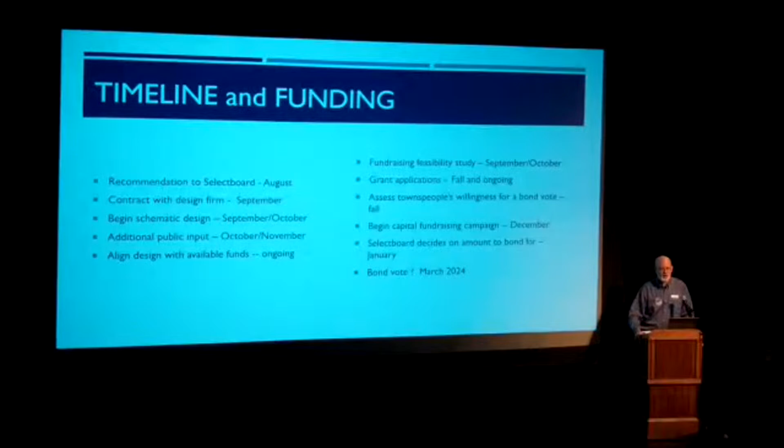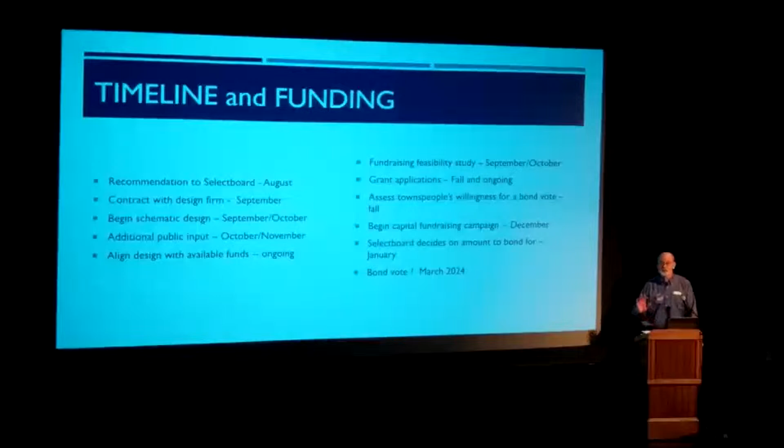Dana and I spent some time at the polls on town meeting day, and person after person came by and said to us, 'We love the library, we love the library.' Our question to them is, how much do you? Because you do understand that a bond vote would mean raising your taxes. How much are you willing to raise your taxes for this incredible project?

So we'll look at our funding sources. If we feel confident about moving ahead with the bond vote, we'll try that for March of 2024. Now, the last time we tried this renovation expansion project, we did not go forward. We want to make sure that we do go forward this time, so we're going to look very closely at the funding situation. We want to make sure that we're good stewards of taxpayers' money.

The most optimistic scenario is the one where we have the schematic designs completed, we have a positive read on the amount of private funds we might raise, we got positive responses from our grant applications, and the select board's fully behind us in terms of a bond vote. If all those stars align, we would hope to have a successful bond vote in March of 2024 and maybe break ground next summer or early fall.

If we don't see the $15 million there, then we're going to work very closely with the select board and continue to seek other sources of funding. We could even wrap the library project going forward should there be some progress on the EDI site development. But anyway, if you have $15 million to spare, would you please let me know right after this meeting?